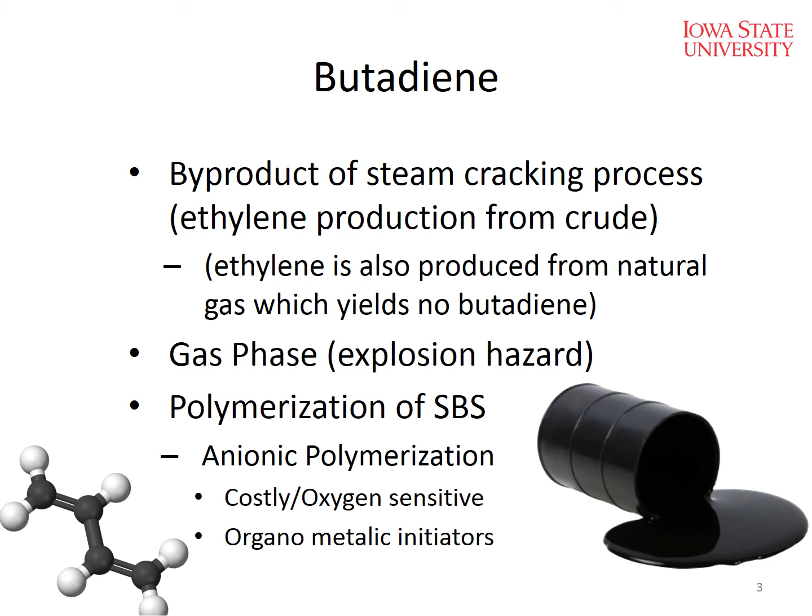And we got into doing this because of the lack of polymers in Iowa in 2007, 2008. And the Iowa DOT said, Chris, what are we going to do if we can't use polymers anymore in our pavements? I said, well, can we develop polymers from different sources? And so we began from that basis.

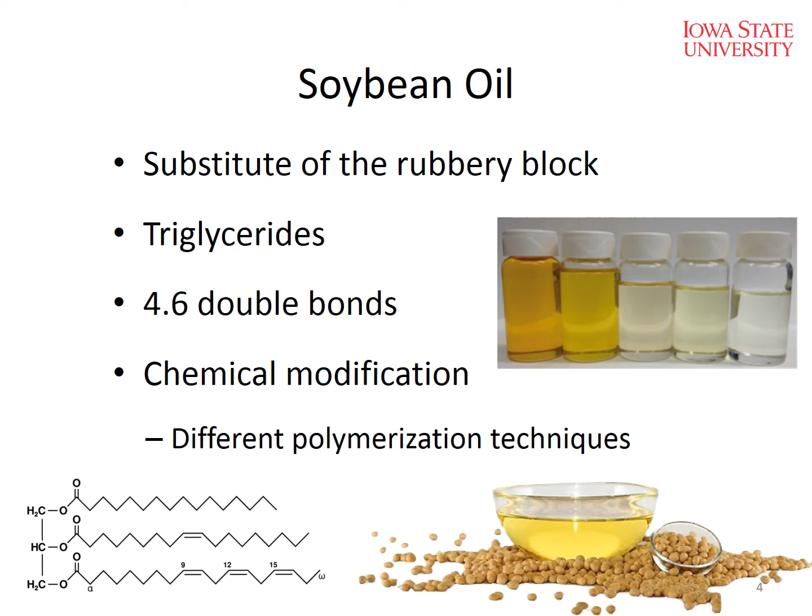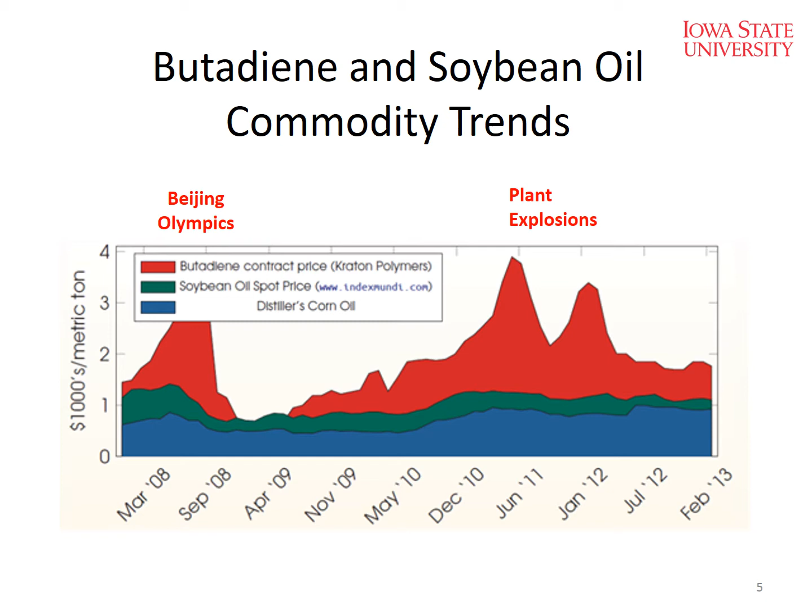Well, butadiene, it's not safe. In Louisiana, there's a plant problem, 73 injured, 1 dead, June 2013. It's expensive to transport butadiene, $300 a ton. Okay. We had a derailment south of Louisville in November. All right. So see, they're trying to keep the tanks cool, so we don't blow them up, basically.

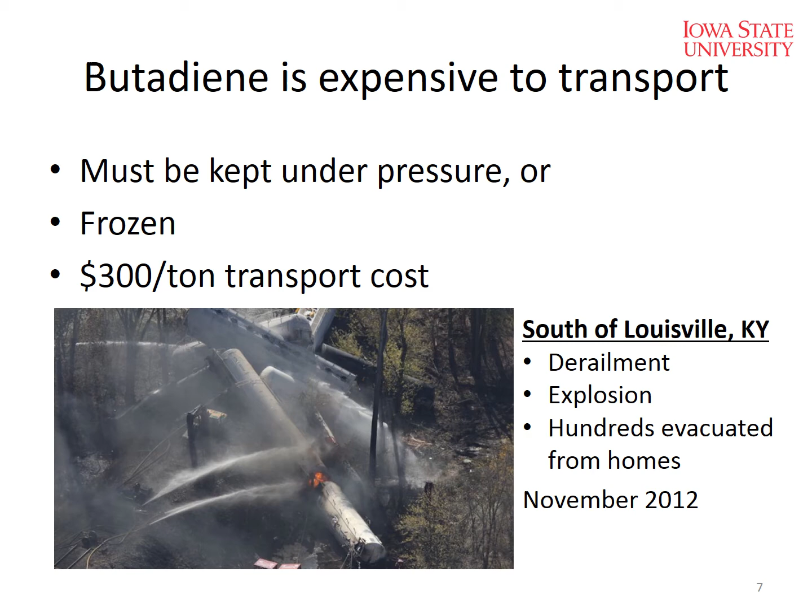All right. So the question becomes, how are we going to use these vegetable oils in producing polymers? We use a radical polymerization process. Okay, and there's two different types. We won't go into a lot of detail on the two different methods, but one is the atom transfer radical polymerization, which we refer to as ATRP. And then there's reversible addition fragmentation chain transfer, or RAFT.

Now, in RAFT, we have an option of building our polymer chain on the end, but we've also developed a system where it's like a gearbox. And so as these gears are spinning in the middle, we can actually grow the chains from the middle with a gearbox kind of system. Gears turning out, the polymers in the middle. And we can control the molecular weight and the chain of these polymers very, very well. So our preferred process right now is the RAFT, actually. Okay.

Well, you know, what's exciting about this is that these polymers came from the asphalt industry, right? Asphalt folks coming up with new polymers that can go across the entire spectrum of the polymer industry, okay? And we're only one small component of the total polymer industry. So I think that speaks to the level of innovation that we have in our industry. So we're just the one little leaf there on the bigger polymer tree here.

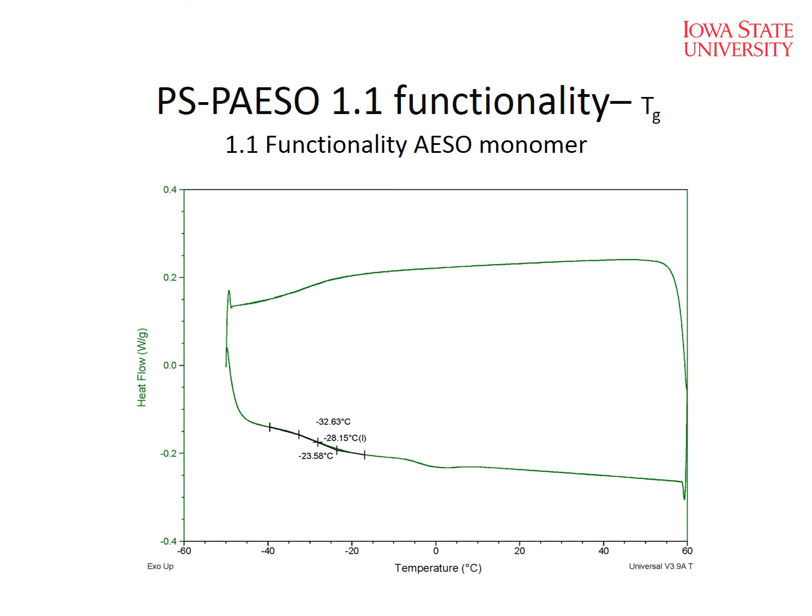And then we can change that functionality down lower to 1.1. And we can drop the glass transition temperature down lower. Okay, so we can tune these polymers based on end market opportunities and things, right? And so we actually can look at our glass transition as a function of the degree of acrylation and their functionality, okay? So this took a fair amount of time to develop, but this helps us understand how to produce these polymers.

So if we're at a higher level of functionality, we're going to need to use different solvents than we're used to using in producing polymers. So the one that we've selected when we're up at the 2.5 range, we need methyl THF. Okay? Well, that's a little bit more expensive. All right, and then we can do those polymers, and then we can look at the effects in modifying asphalt, and we can take a PG 52 grade and make it a 64, or we can even push it up towards a 76 with 3% modification.

But if we drop down in this acrylated group functionality, we actually can now move towards using a cyclohexane, which is more of an off-the-shelf solvent for producing polymers, and then the solvent removal process is easier. But we also find that we get better conversion quicker in producing our polymers. So we can move from 10 or 12 hours in producing the polymer now down to the 6-hour range.

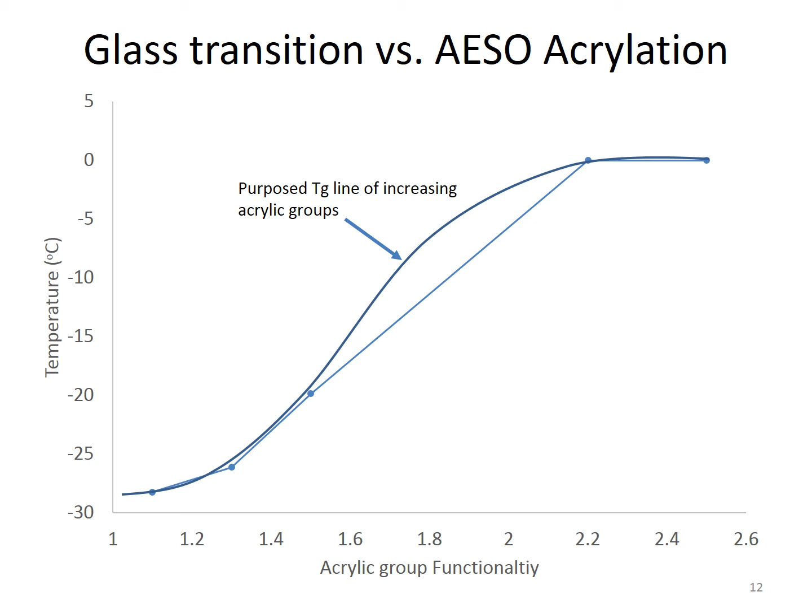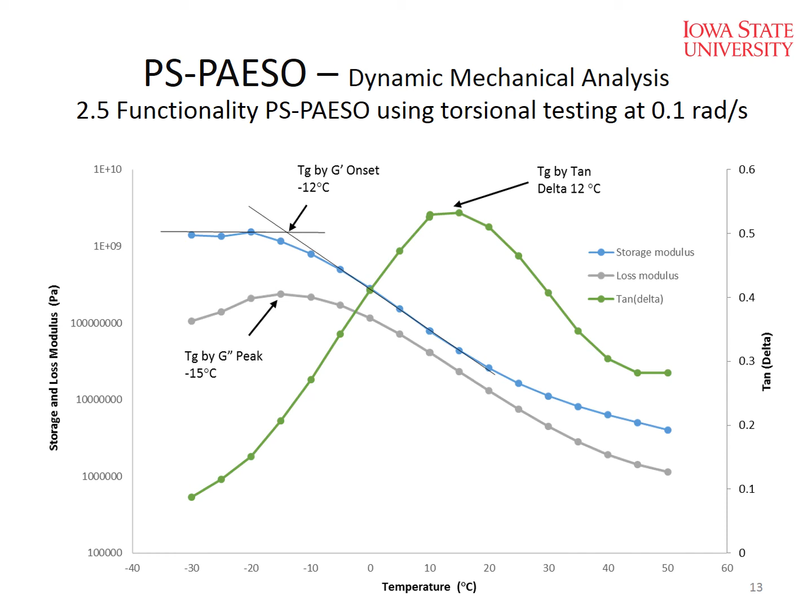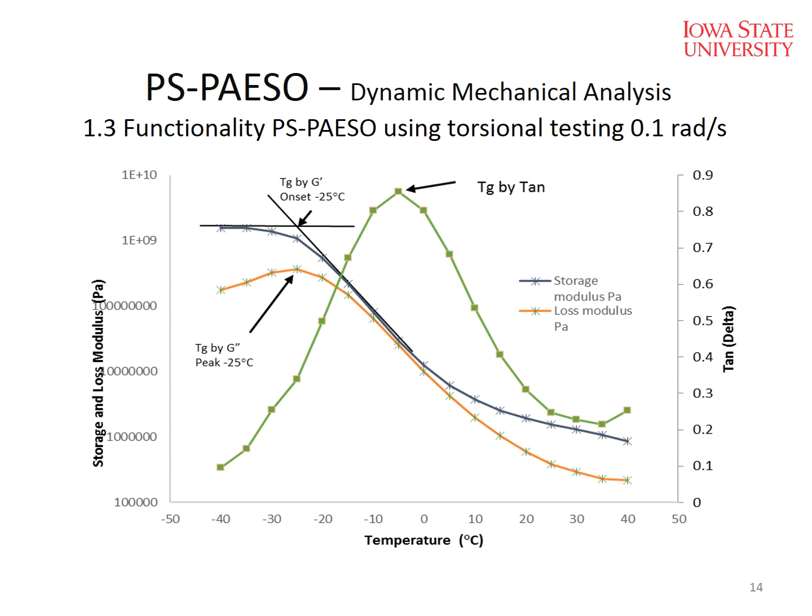This just shows you doing some DMA work where we get our glass transition temperature. This is again a 2.5 functionality. And it just highlights that we're about minus 12 centigrade. Okay? We go to the 1.3 functionality, we drop it down to minus 25. We can drop it down to, like I mentioned before, 1.1, and we're about minus 32. Okay? So that's pretty impressive.

So most of the people in the asphalt business that use polymers don't know what goes into making that a friendly material to use, right? We need to have storage stability, and we need to have what? Inhibitors, right? Polymers are always reacting and chaining out, okay? And so what are we doing to inhibit that process? So we have to look at kind of the standards that we have.

Often people are using an Ethanox 310, and then we're trying to find out where we can get our blend temperatures up with the polymers in the asphalt, okay? And so we can use a methyl hydroquinone to help as our inhibitor, okay, and stretch that out.

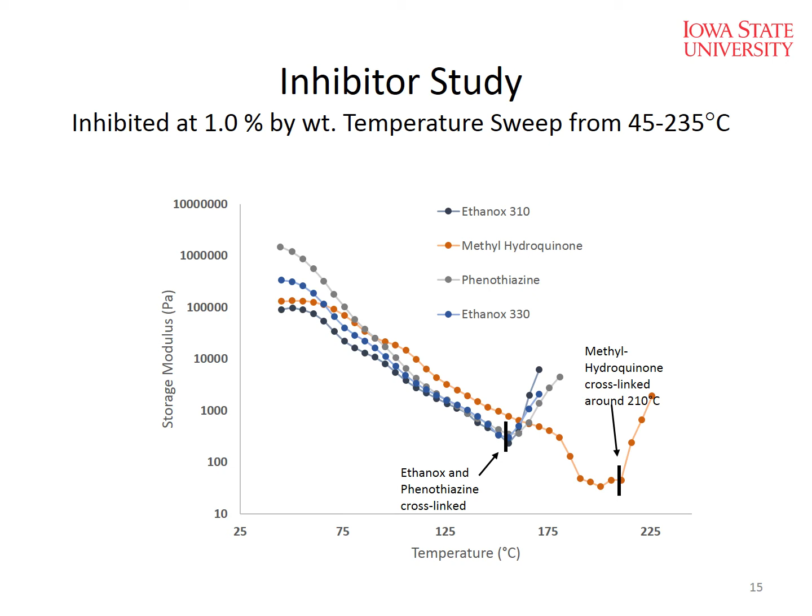And so we've gotten out that way with a methyl hydroquinone. We actually use some other ones we can't really get into a lot of conversation about right now. It stretches that even a little bit further out there.

This is a busy graph, but again, this is just highlighting that we can see the cross-linking temperature, again, out towards that 220 mark, and what we call the order-disorder transition and stuff. And then this highlights the 30 versus 35% polystyrene content, and we're inhibiting at 1.5%. All right, so if we drive that polystyrene content down lower and then we look at things, we can drive these inhibitors to these temperatures being quite a bit higher.

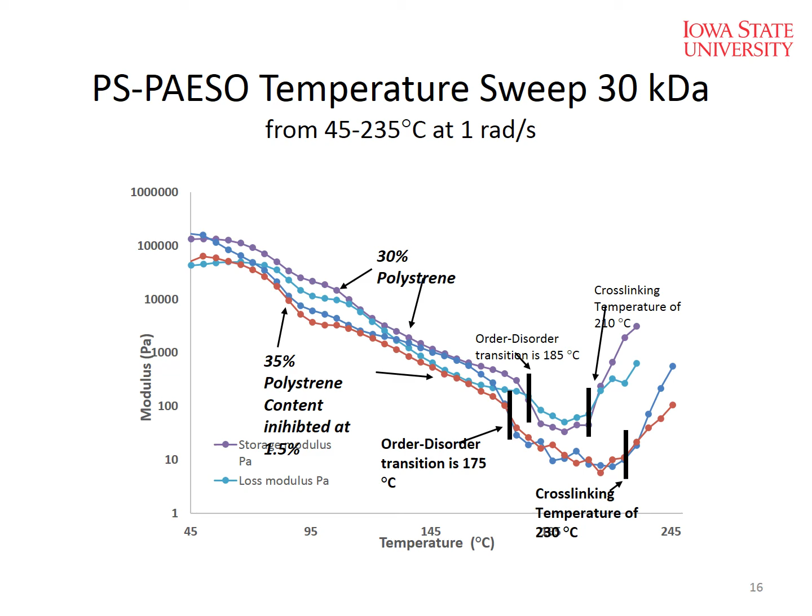All right, so let's go into asphalt modification. This just shows the hard block and the soft block components of a typical SBS polymer and asphalt. Okay, and Shell/Kraton is really the market leader developing this technology and implementing it.

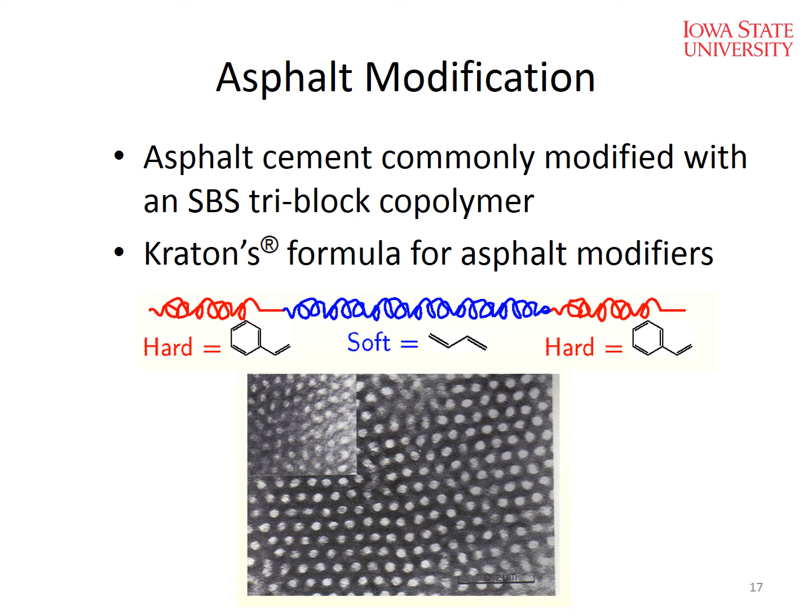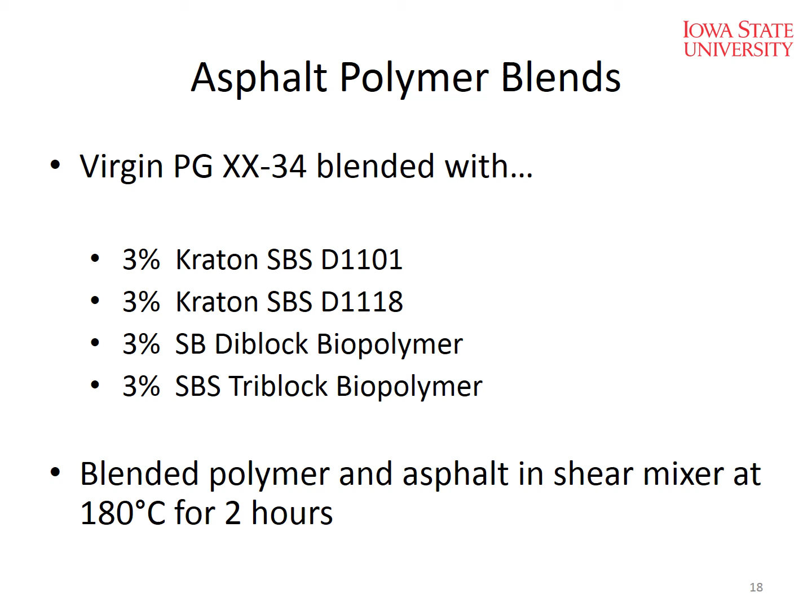We can go in and take an asphalt from Flint Hills. We refer to it in the Midwest as an XX-34. Most of the time it grades out as a PG 46-34, but every once in a while it grades out to a 52. So it's usually right around a 50, 51 on a continuous grade basis. Okay? So we're not trying to one-up, let's say, the Kraton polymers. What we're trying to say is those are the industry leaders, and how do these polymers compare to industry leaders? Are we kind of in a reasonable space?

So when we go in here, and this is from work from a year and a half or so ago, we can benchmark to the 1101, 1118, and then we can look at the diblock versus the triblocks, and what we did is we reacted this out at a higher temperature, and that's what produced the better performance grade for us there. Okay, so reaction temperature matters basically.

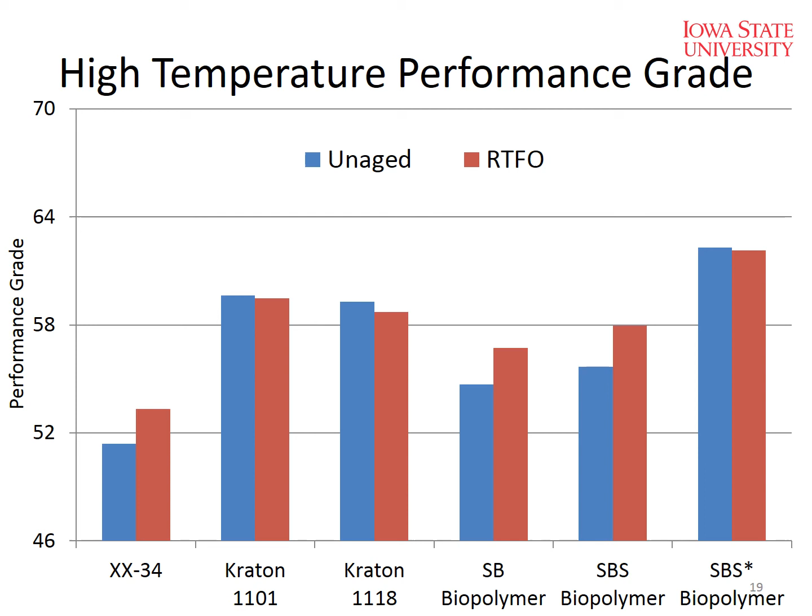This is what it shows in the RTFO, and this further highlights the fact that with the diblock and the triblock, if we run these out at higher temperatures and blending, after RTFO there was some more chemistry occurring, and that's what we see here. So we have kind of some similar aging going on there.

So we can look at the low temperature aspect of things, and we look pretty good on a continuous grade basis. Okay, maintaining minus 34, and this just gives us continuous grade ranges. So again, the reaction temperature is pretty important to get something with a broader continuous grade range.

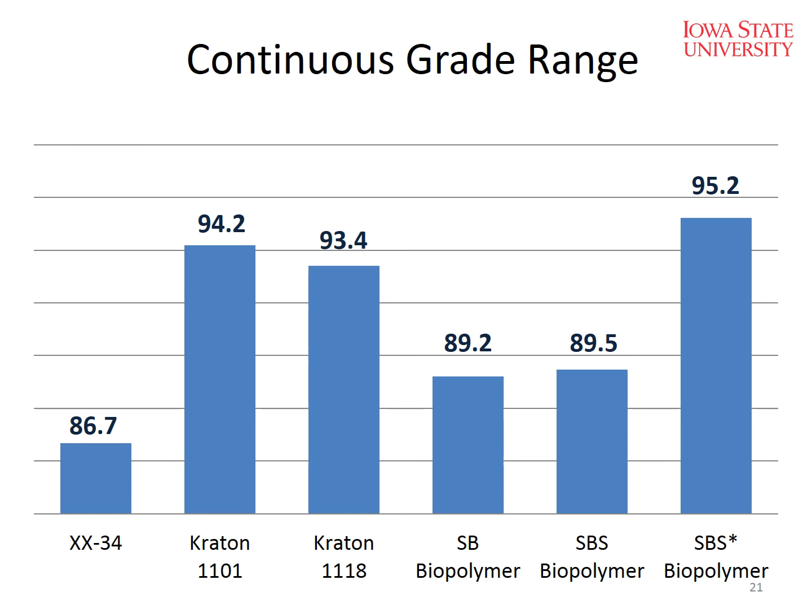Now we start zeroing in, and we want to start focusing in on the molecular weight and the styrene contents. And so this is at the higher level of acrylation. We can see at the varying levels that not necessarily higher styrene content produces better results in terms of stiffness. What this shows is that with 3% modification, we can take a 51 continuous grade. Right there it says 52.9, 53.9 was the range.

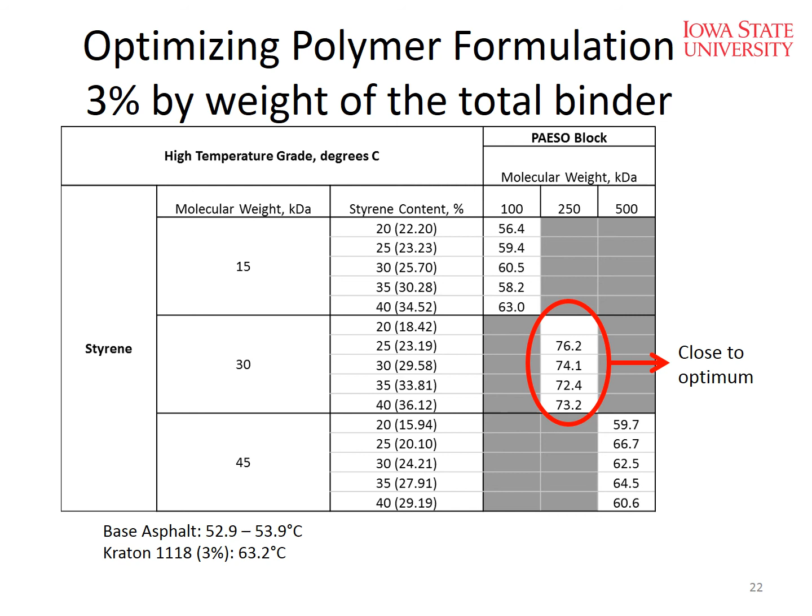So in every experiment we run blanking samples on the controls. We don't assume that the control is always the same. But this tells us that at 3% modification, we're going up quite a bit in temperature range.

All right. So there's a pretty famous innovator who said it's really hard to design products by focus groups. A lot of times people don't know what they want until you show it to them. And so that's Steve Jobs. Okay. So I agree with consensus building, but that's probably not the best way of developing innovation.

Okay. So now we're going to move out of the lab. So we started off making samples in the lab years ago that were measured in grams. Then we moved to tens of grams. Then we moved to hundreds of grams. Now we're kilograms in the lab, right? Well, every step you go in this, we're now at 50 liter reactors in our labs, and when you start getting that volume of solvents in there, our environmental safety people start getting a little bit nauseous with some of these things, right?

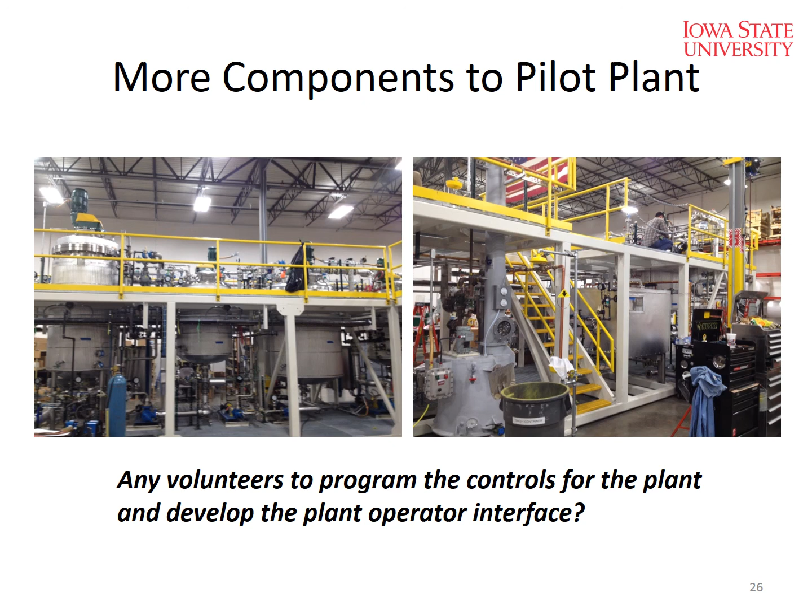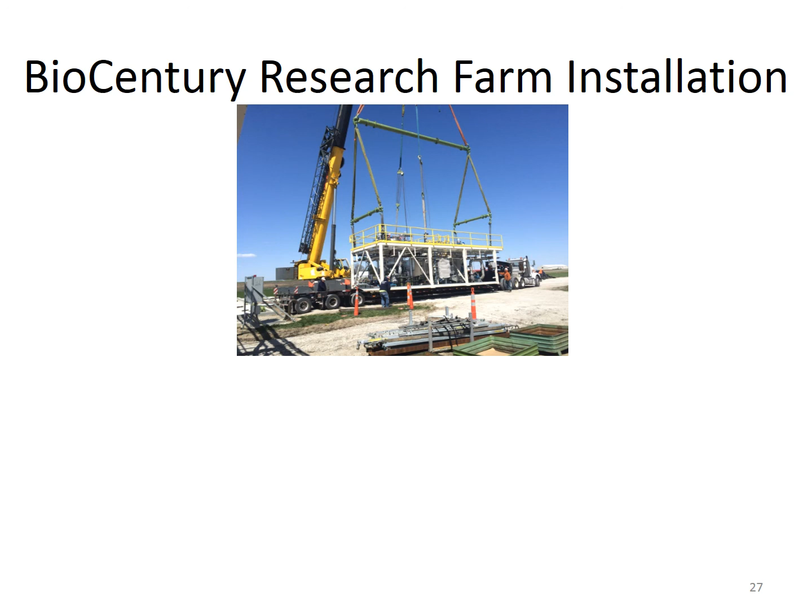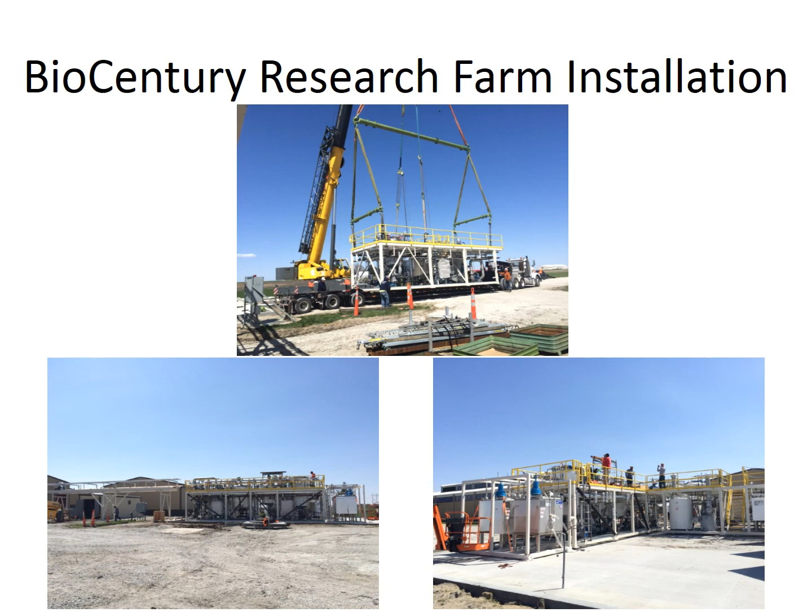So, beginning in May, we began installing the pilot plant at our BioCentury Research Farm. So this is on Iowa State's property, and this is about 8 miles from campus. And so you can see the installation ongoing here, okay? And then this is the plant before the security fence went up in August of this past year, okay?

So this is a $6 million facility. So what we did is Seneca formed a couple of sister companies, Argogenesis Chemical and Midwest Acrylated Processes. And so what we reached an agreement on with the university and the companies is that they would design, build it, demonstrate that it works, and then they donate it to the university. Okay? So now this is a university facility, and then Seneca pays us to operate the pilot plant. Okay?

So we fast forward more on the research side, and working with some of these folks in chemical engineering, they love to change multiple factors at one time. And I go, we don't know the outcome of what you've done then. They're more on the science side, and me being an engineer, I'm like, no, can you tell me what had the greatest impact? So I finally convinced them that we need to have what we call repeated statistical measures design, and we need to develop basically formulation models, okay? And so that's what we've done.

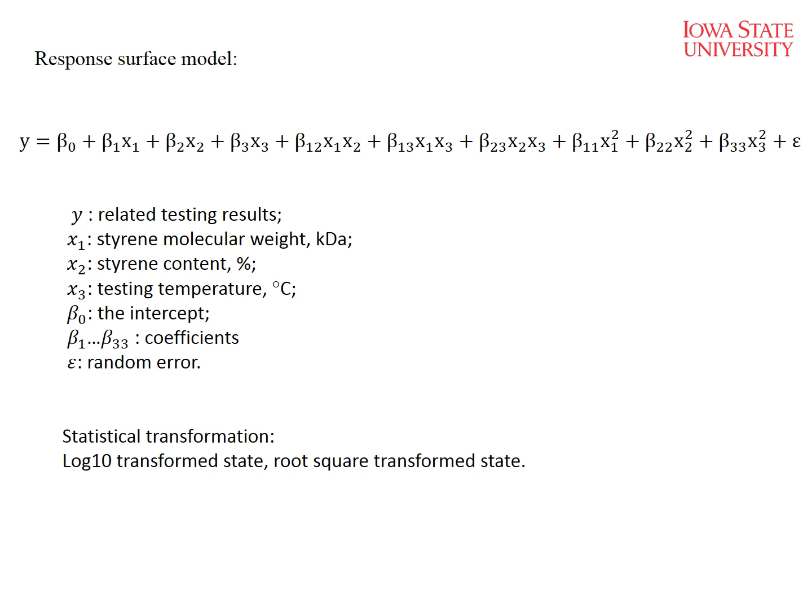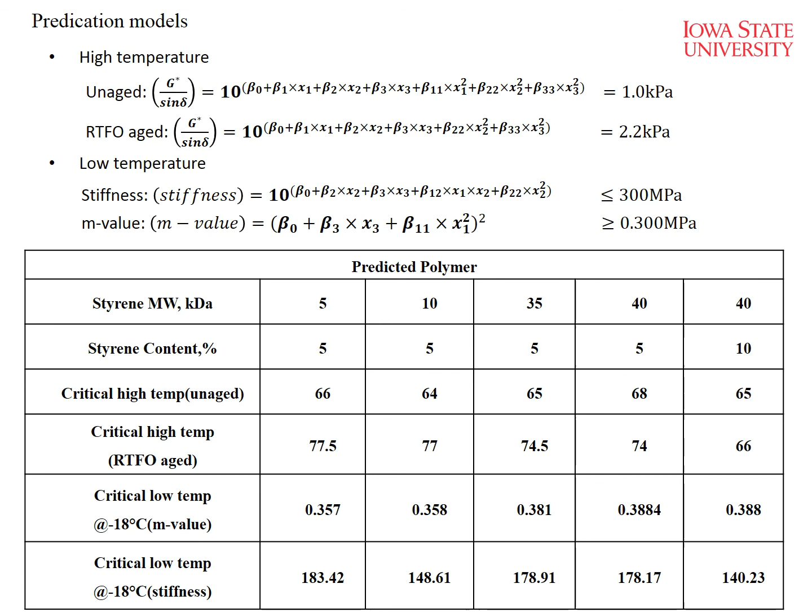I said, well, let's produce, I think it was a 20 kilodalton styrene with 20% styrene. No, maybe it was 10% styrene. At any rate, I said we should come out with a 67 grade on the high end. They said, there's no way you're going to hit that mark. They produced it, and yep, it was within 0.2 degrees. They said, it's luck. And I said, well, go ahead, make some more polymers for us, and we'll figure out if it's luck.

So we've also developed this. Sometimes you have to adjust the formulation of your product. So how about this new type of polymer? How does it work? For use in RAP? No, not RAP. Different asphalt sources. Oh, different sources. Yeah. We don't think there's a problem because we've looked at the Flint Hills, but then we've looked at AAM and AAD.